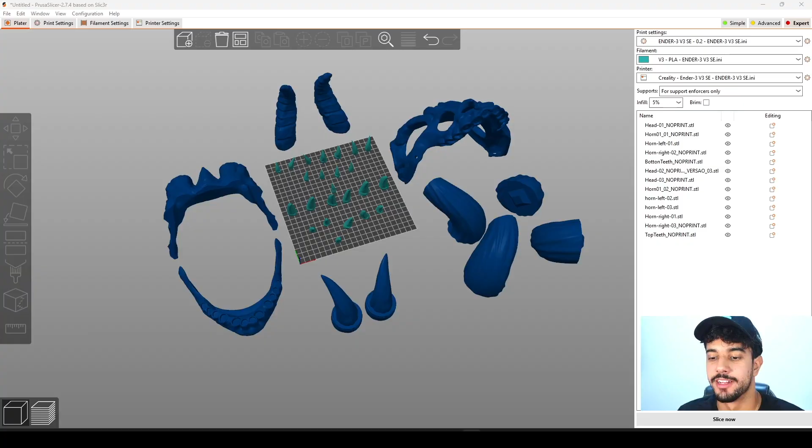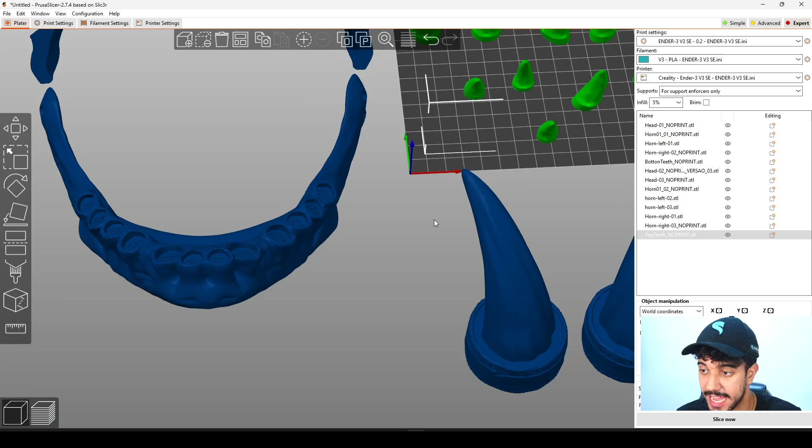So this is the Dragon Slayer helmet, and as you can see, this is a really nice helmet, and in this video we're going to be checking out the best print settings to print it. As you can see, we got multiple parts. There are a lot of horns, as you can see. This is a fantastic model with lots of teeth. Right here, we got some numbers so you can attach each of the teeth correctly. So that is fantastic.

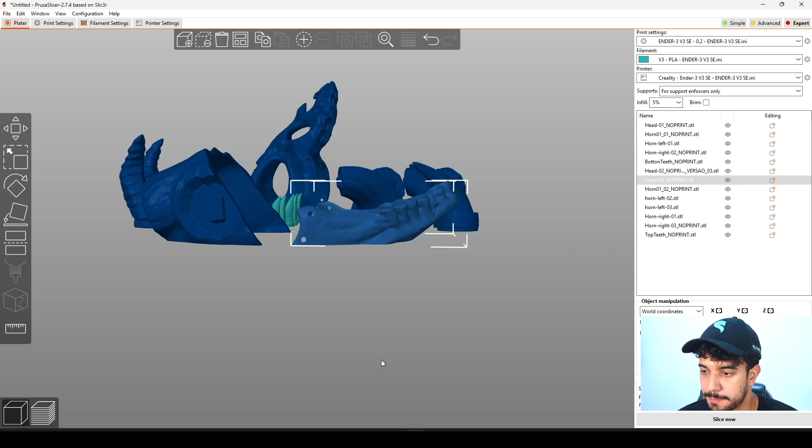So let's go to the print settings. Before we start, let's consider some things before we change any of the configurations. As you can see, these parts are quite simple to print. They got an overhang right here, but your printer can print without any worries. As you can see, it looks quite nice. All of the horns too just have a quite steep overhang, but this model is quite easy to print.

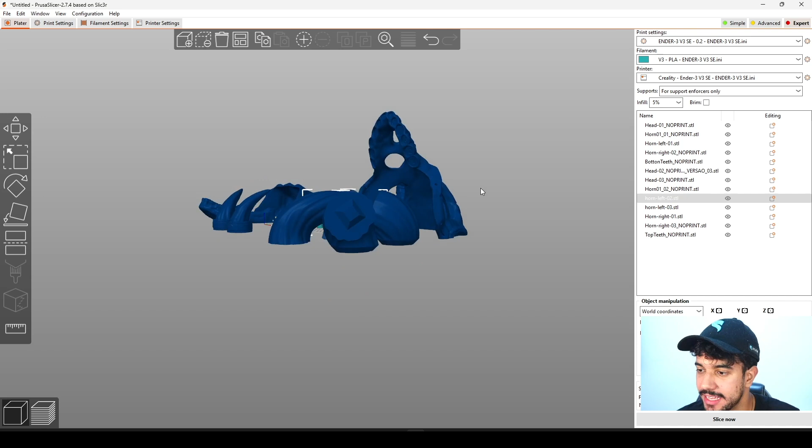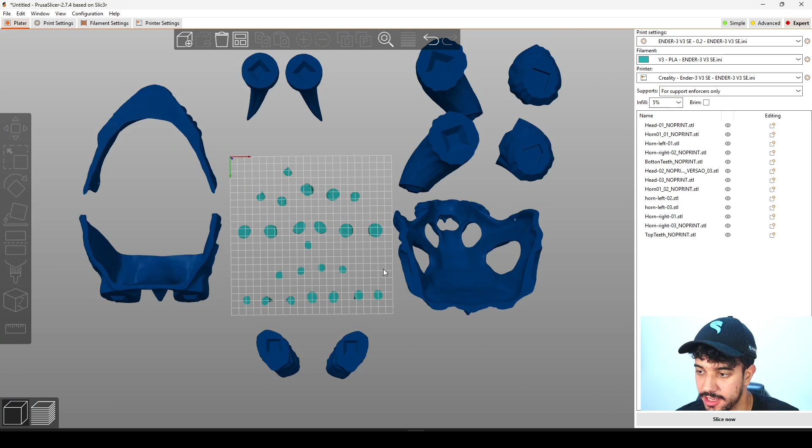There are some parts that need support, and the most critical part is all of the teeth, because they have low surface of contact to the build plate. So we need brim on these models, so be aware of that. And this model too needs a little bit of a brim. All of the parts can be printed with the same print settings — just the support and brim are going to vary. Some parts do not need any support, some parts don't need brim, and so on and so forth.

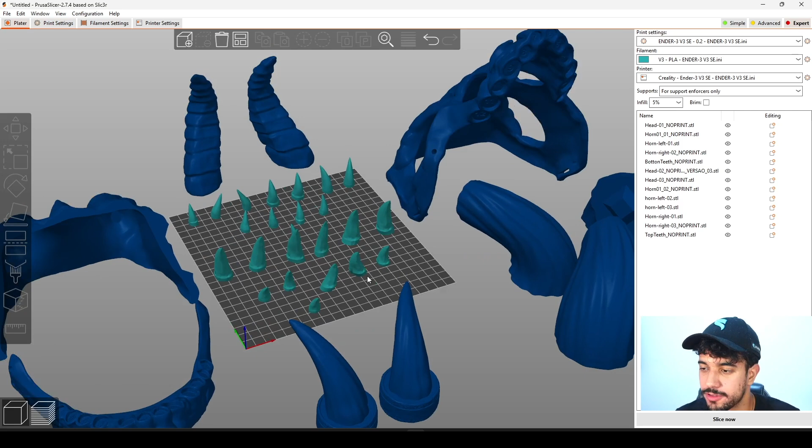First off, all of the parts can be printed at a 0.2 millimeter layer height. As this model is quite big, at 0.2 millimeters we're going to get a good balance between time of print and quality, so you're not going to be able to see those fine layers. As for vertical shells, we're going to be leaving at 3. This way, we're going to get a really rigid model so it does not break, with a 10% infill pattern, as you can see right here.

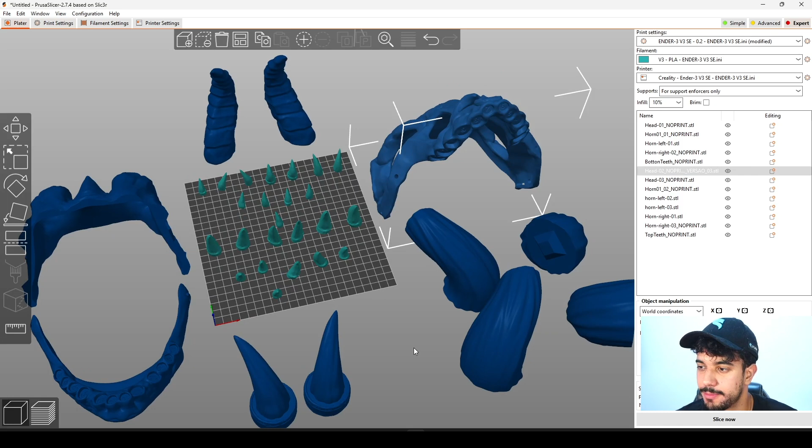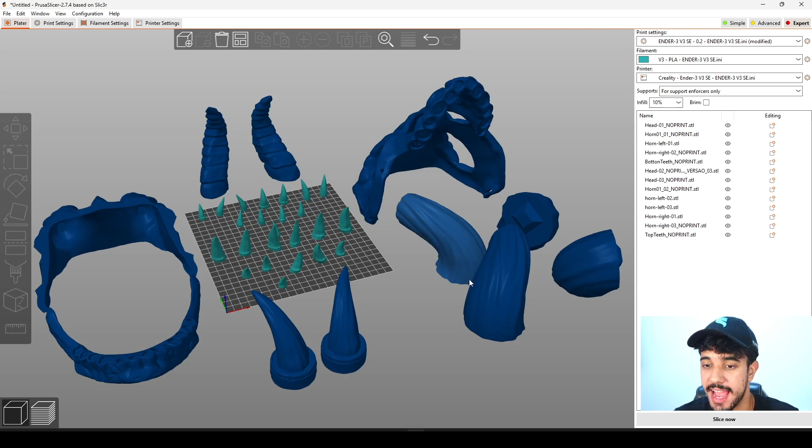As for skirt and brim, we're going to be adding some brim to this model. If you have some bed adhesion issues, brim increases your surface of contact to the build plate to avoid your prints unsticking. A good thing to do to help with bed adhesion is, first off, clean your build plate really well, make sure that your printer is really well leveled, and third, feel free to add external adhesions such as glue stick or anything like that.

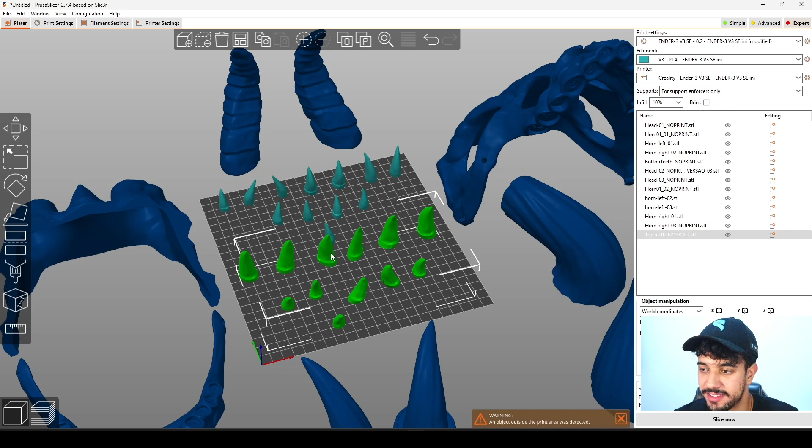So in this case, for these models, we can be adding a little bit of brim. I'm going to be showing you how to add brim just to specific models, instead of adding brim to the whole build plate.

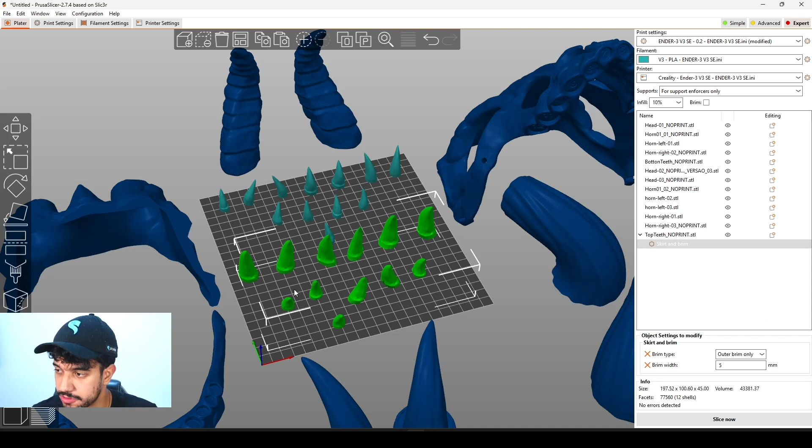To do that, we can just select the model, right click, add settings, skirt and brim, brim type, brim width. So for the top teeth, we're going to be selecting a 5 millimeter brim, as you can see. So top teeth has some skirt and brim now. What we can do is Ctrl C, go to the bottom teeth, and select Ctrl V. Now we got some skirt and brim on both models, so that is fantastic.

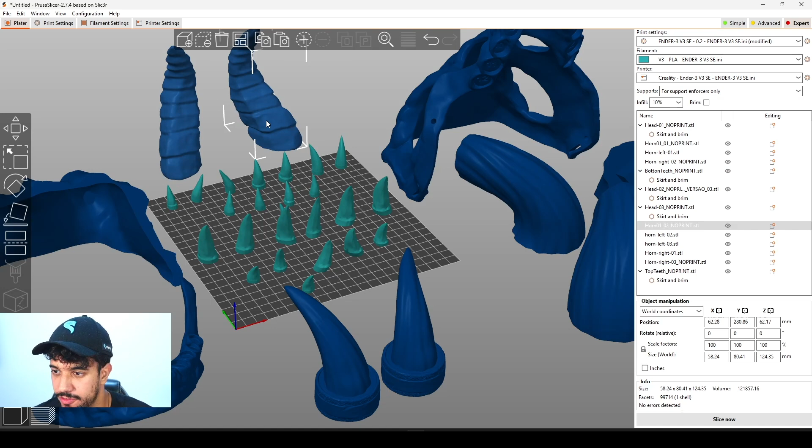And if you want to add it to this model too, you just select Ctrl V, and other models that might have some bed adhesion issues, such as this one and this one. It's always good to make sure that you got really good bed adhesion, because you do not want your models unsticking from the build plate. So as you can see, we added brim to a lot of models. Feel free to add it to all of them actually — this model's got a solid surface of contact to the build plate, but this one I would recommend because they got a steep overhang and they're quite tall. So feel free to add to all of them.

Going over to support material, it's going to vary between models.

So I'm going to be showing you later which models need paint-on support. As for speed, feel free to print these models with the speed you may like, because it's always better to print slower.

Printers vary, so the speed is going to vary. There's not a specific speed that applies to all printers. So what I would recommend is print with your default speed.

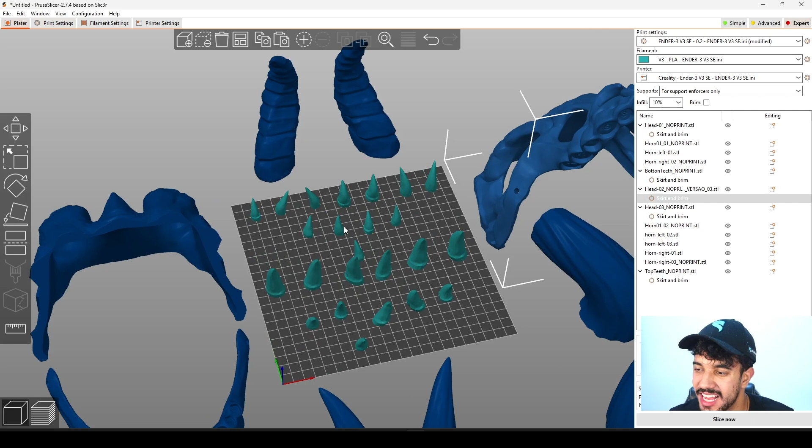Feel free right here to reduce the small perimeters value a little bit. On small perimeters such as these, they print slower to get a good quality print. Feel free to print with the standard print speed, but if you're going to change any of these values, always go to slower values. Use a profile you may like, but always lower values.

Better to print slow one time than try to print really fast and have it fail multiple times. Right here on the first layer, I've reduced from 30 millimeters to 20 millimeters just to get a good first layer. The first layer is the most important layer, since all the other layers go on top of this one, so guarantee a really slow first layer. We're just going to be slicing this build plate that does not need any support.

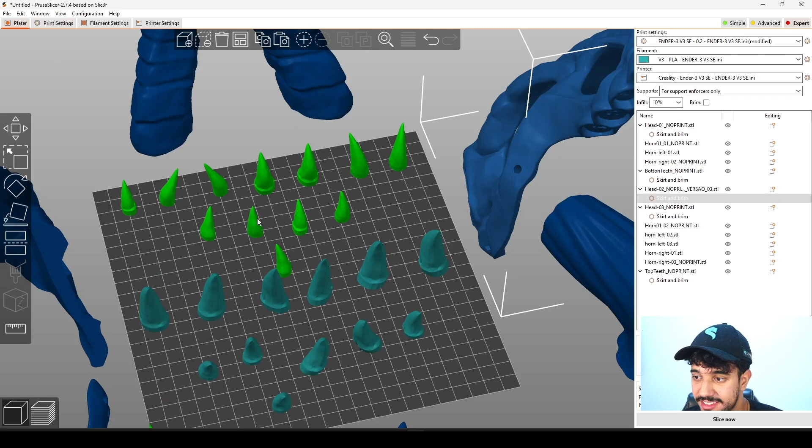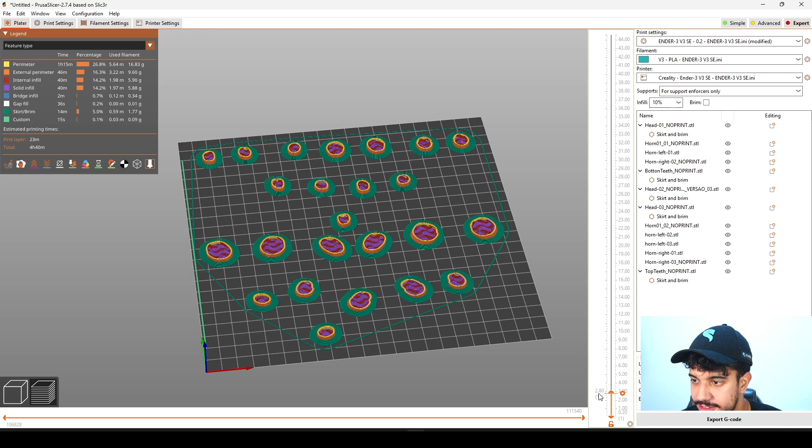Then we're going to move to more critical models that need support. Let's slice to take a look initially at how the brim is going to work out with these models. As you can see, we've sliced and it added the custom brim that we needed. This is really nice to know. We got all the numbers to attach it in the right place.

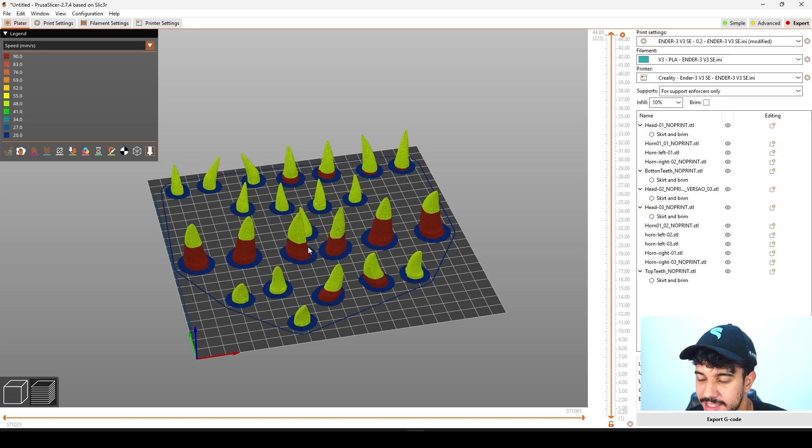If we go over to speed, you'll see that it reduces the speed on small perimeters such as the teeth, which helps a lot with cooling and print quality. So always reduce a little bit. As you can see, it was printing at 90, then reduced to around 50. Take a look at this value, it's really nice to make these changes.

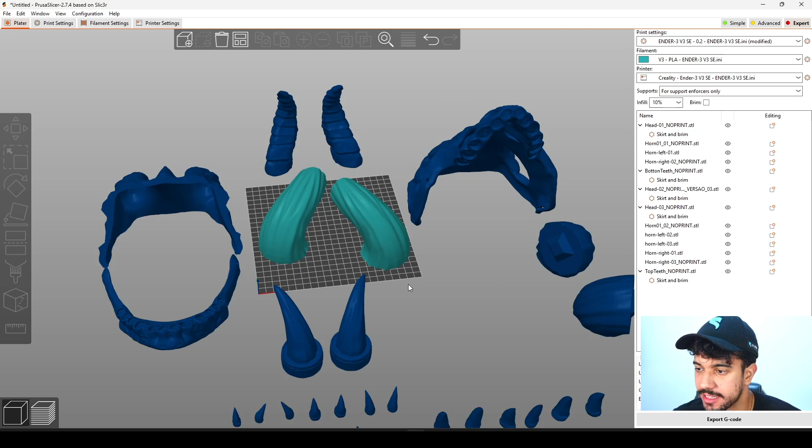Now we're going to take a look at this model right here. Before we add this part, let's take a look at the horns. As you can see, we've got a really steep overhang right here. Does it need support or does it not need support? We're going to check right now.

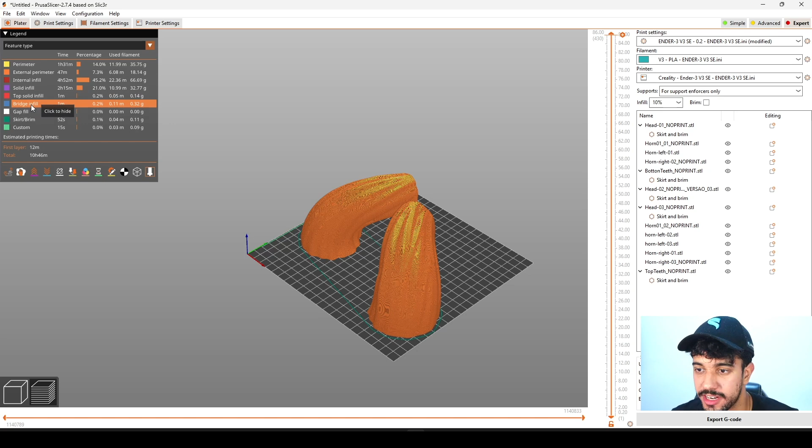To do so, I've sliced right here. As you can see, if we needed support, it would show up as bridge infill, which is blue, in this underpart. But it's all orange right here, so we do not need any support material. This is a really short bridge that your printer can print without any support, and this part doesn't need support at all.

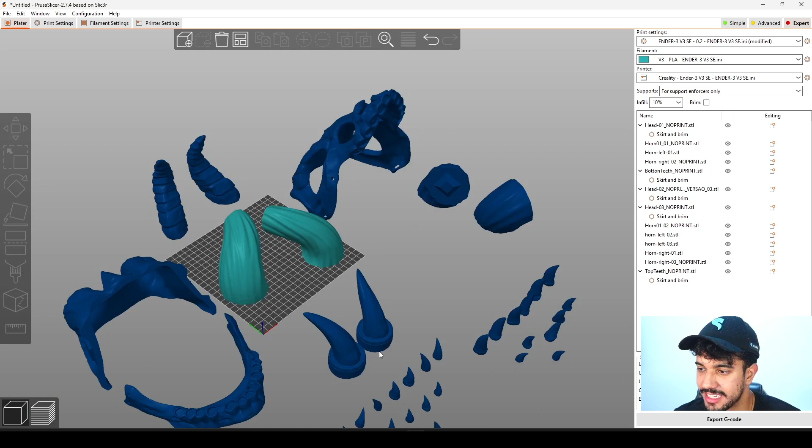So this model doesn't need any support, even if you thought it might. Let's take a look at this model right here. We're going to slice and check out this model right now. As for this model, we've sliced, and as you can see, no overhang signs.

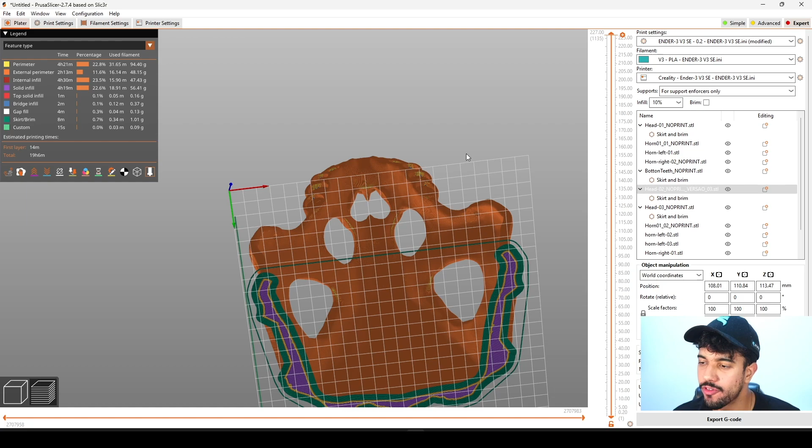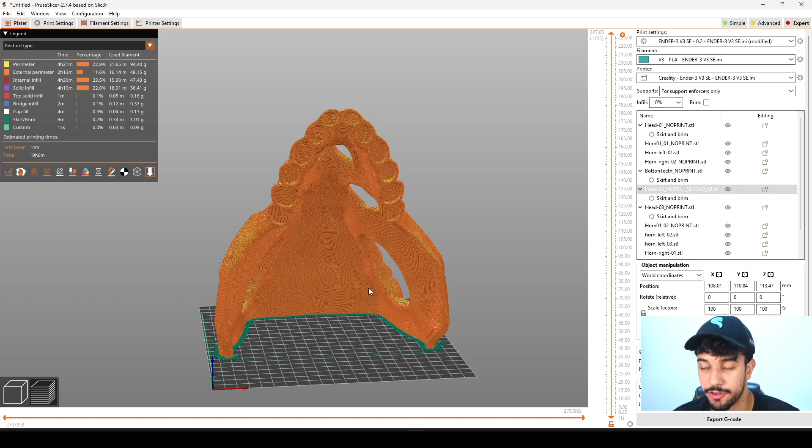That's fantastic. This is an optimized model that doesn't need any support, and it needs a lot of brim right here because it doesn't have the best surface of contact with the build plate. So you're covered, this model doesn't need any support, and this is a really nice way to know if a model needs support, by slicing. As you can see, all the layers look fantastic, so it's perfect.

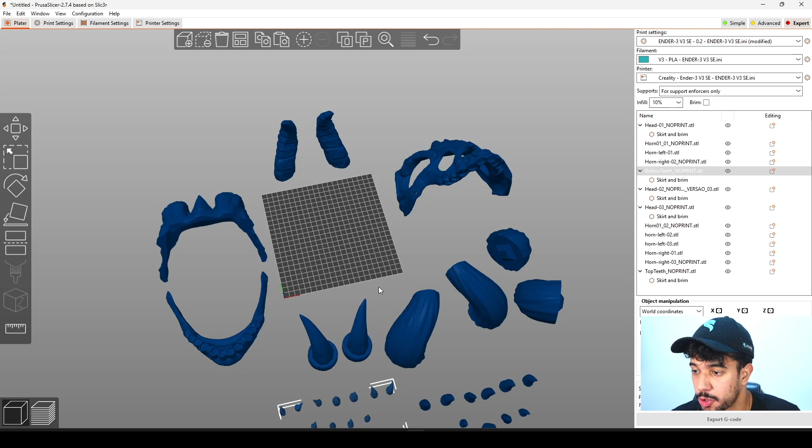Feel free to add some brim to all of the models. Right here, I've set some skirt and brim on the parts that are more critical, but this is quite an easy print that you don't need to worry about with support too much, just the brim and bed adhesion.

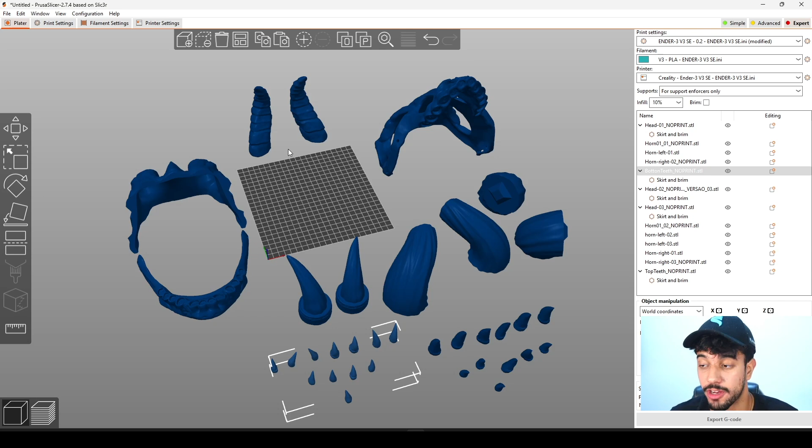I hope you enjoy, it's really nice on these multi-part models to print in different colors to get a really nice end result. So enjoy this model a lot. I hope you guys enjoy it.